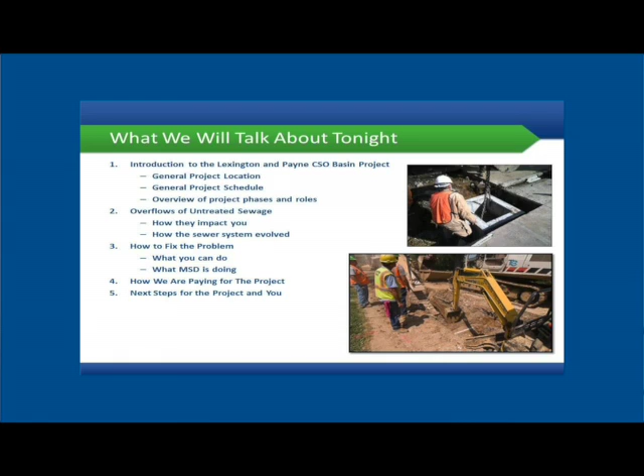Tonight we're going to be talking about an introduction to this basin that's in this neighborhood area. We'll talk about the general project location, the schedule, overview of the project phases and roles, overflows of untreated sewage, how they impact the community, how the sewer system evolved to how it is today, how we can address or fix the problem, what we can do as residents, what MSD is doing as an entity, how we are paying for this project, and what the next steps are as we move forward in this project design.

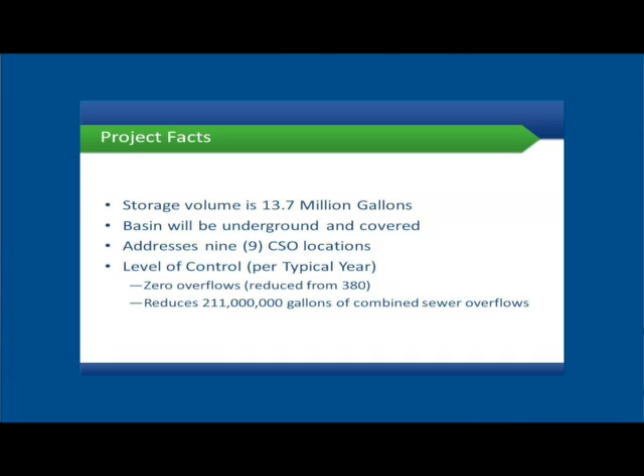This project that we're talking about tonight, again just in the beginning of the design phase, is going to store about 13.7 million gallons of overflow, which is diluted rainwater, stormwater mixed with sanitary sewage during rain events. The basin will be underground and covered. It addresses those 9 CSO locations shown on the map previously. The level of control means we had to pick a design year, which is 2001, a typical year. Typically we would have 380 overflows of sewage when it rains into Beargrass Creek Channel, but we've designed this basin such that for that same design year there would be 0 overflows. That amounts to about 211 million gallons of combined sewer overflows that are eliminated from Beargrass Channel on the typical design year.

The next phase in our major projects rolling out for public input would be the conceptual design. That's where MSD would come out, present concept options, and gather ideas and preferences from the community and the neighborhood where the basin or project is located. The third public meeting would be the advanced design, where we'll come back with design options after hearing input from the conceptual design phase, presenting options the public can review and again give input on for ideas and preferences at that time.

At that time, we'll go to the final construction or final design phase, and we'll come back for the last public meeting, prior to construction. At that point, we'll announce when construction begins, who the contractor is, and who our contacts are with MSD and the contractor, so you know who to call if you have a problem.

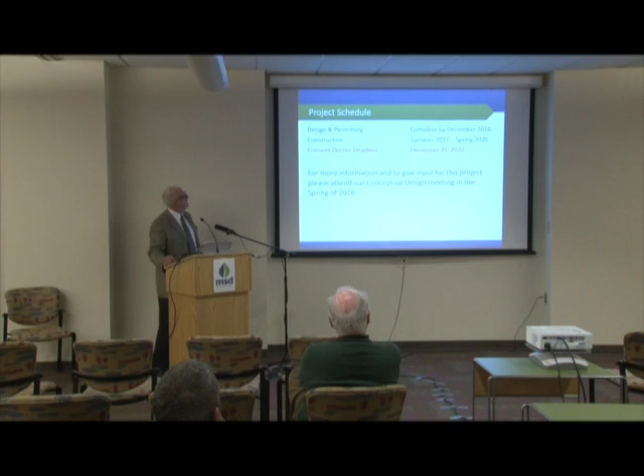For more information or to give input, we'll come back in a few months. We'll talk about information we've gathered today, and we'll have gone into some conceptual designs that we'll present in the spring.

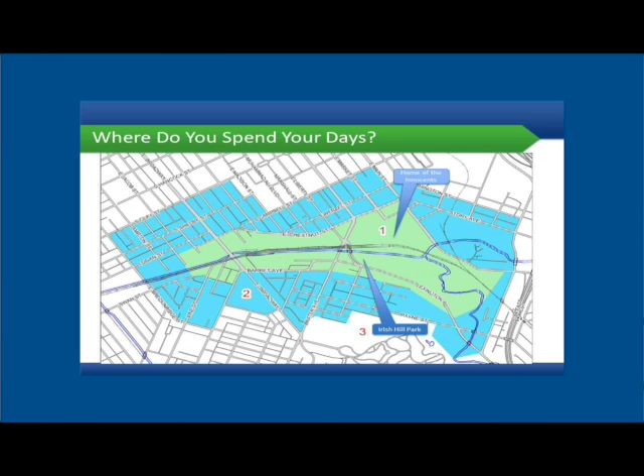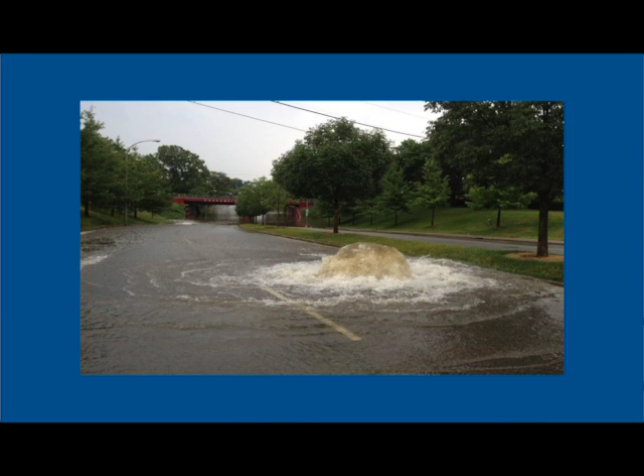What you may not know is that it also happens in streets. This is down close to U of L. So in a rain event, our system can overflow, and that's not just rainwater coming out of the system - that's sewage and rainwater. It can come into roadways, backyards, basements, as well as the streams we just spoke about.

So we don't want that in our community. It's not only a visual impediment, but primarily it's a health impediment. We want the health of our streams and the health of the public as well.

So what's the history of this? What's the public health and safety mandate of this?

In 2003, the EPA and MSD started talking about what can we do to improve the quality of our streams and our collection system. In 2005, we entered into a consent decree, and that is that we agreed by court order to do some things to fix the system.

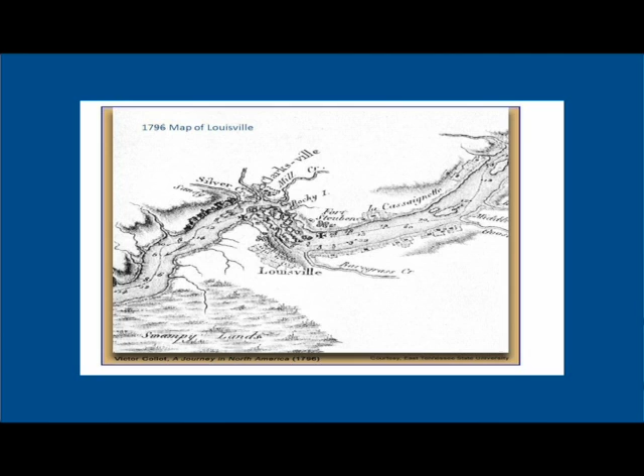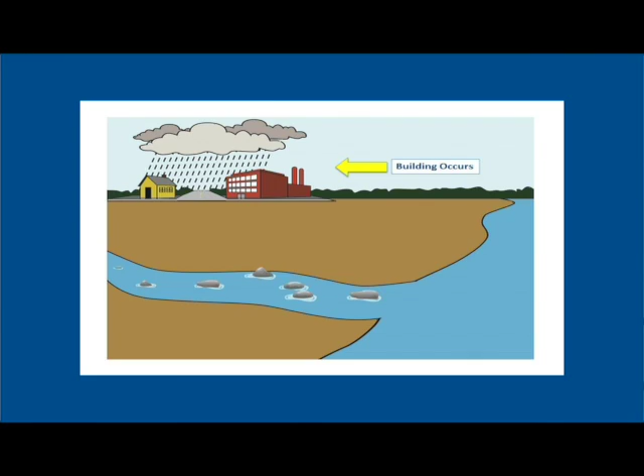So when building started occurring in an area that was swampy and poorly drained, Louisville continued to grow. There was no sanitary system to handle the wastewater or no storm system to handle the storm sewer. Everything just flowed to the streams.

No system. So as a result of that, public health suffered. We had numerous epidemics of cholera and typhoid during this time. And you can see why. All that filth is out there for contact with pets, humans.

So let's get your clickers out. We'll ask a couple questions here. When were the first sewers built in Louisville? When do you think? At the founding of the city, before 1850, the beginning of the 20th century, or during the Depression?

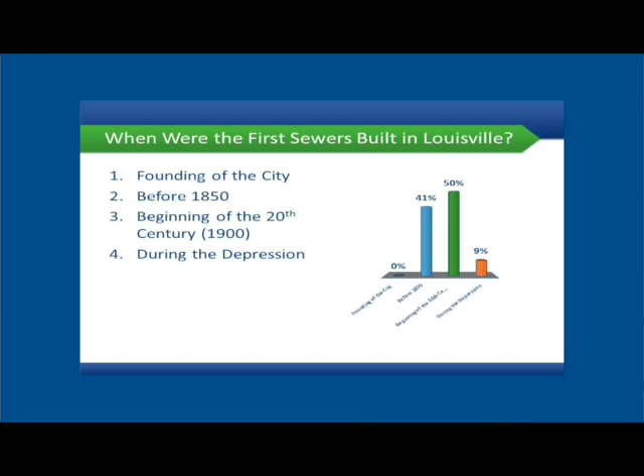All right, people think at the beginning of the 20th century. Sewers were built in Louisville by 1850, the beginning of the work. This is obviously later than that, but in 1850 was when sewers first started to be constructed in Louisville.

We continued to build sewers, larger and bigger sewers. That's the southwestern outfall. That's the backbone of our drainage system that empties out into the Ohio River. It's still in service today. You can see you could fit a locomotive inside that pipe system.

The only problem is this did remove the waste from the downtown streets and the developed areas, but guess where did it go? Went to the Ohio River, to Beargrass Creek, to the Ohio River. Would you want to live in Evansville after a rain event?

Here we are in Louisville. Cincinnati had the same thing. The Ohio River was flowing from Cincinnati down to us. So at the time, we were getting away from the downtown streets, but we're just polluting the larger streams. We learned that everybody lives downstream from somebody else, so we have to do something better than this.

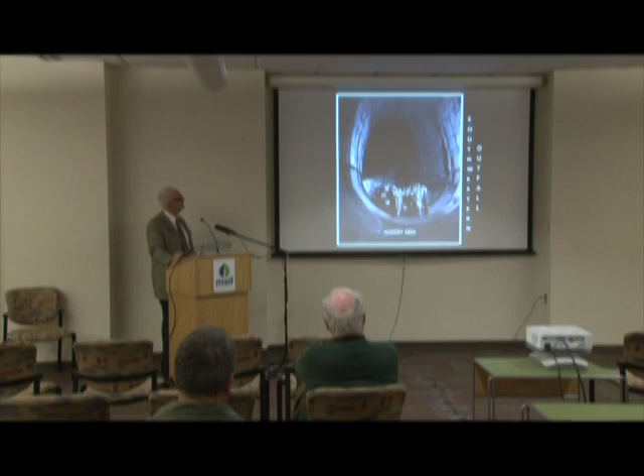So the Louisville Water Company was formed in 1860. Running water started to become available to homes, so you can see water lines are being connected. That meant more water coming into the house. Where is that going to go?

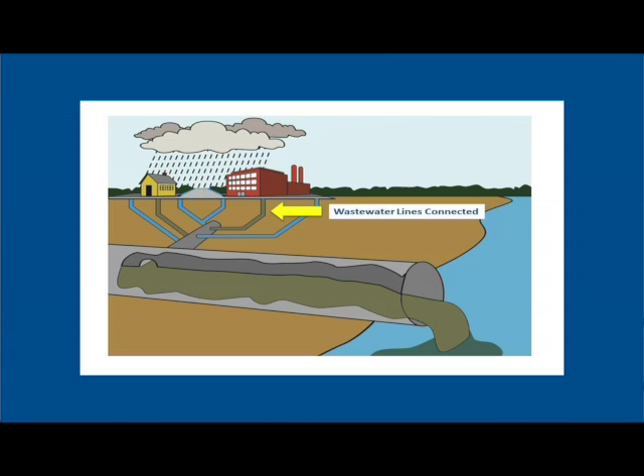So they started collecting the water that was going into the house and come back into those storm systems that were built going out to the Ohio River. So that was one thing that was done. We started collecting from the houses the new water that was coming in from the water company, again, being emptied into the Ohio River.

In which decade did Louisville begin to treat sewage? 1900, 1930s, 1940s, 1950s, 1960s. And recall, up to this point, we're just sending it into the big pipe out to the river. So when did we start to begin to treat sewage?

Okay, looks like a lot of us think the 1930s. It was not, so again, we'll go back to that slide. The wastewater lines were collected, connected, and going out to the stream.

It wasn't until 1958 that the first wastewater treatment plant was constructed in Louisville. So remember, all the water was collected and went out to the stream, Beargrass or the Ohio River, when it rained. When we first started doing treatment, we built weirs in those larger pipes, and had to build a deeper pipe to send it to the plant, so that in dry weather that lower amount of flow would fall into here, and it was just the raw sewage going to the plant during dry weather.

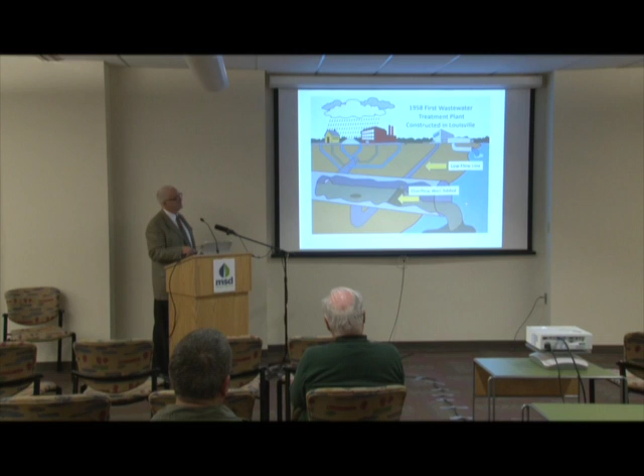Then when it rained and the system was overwhelmed, that's when it was diluted and sent into the Ohio River. That kept the raw sewage from going straight into the Ohio River - it went to treatment, but then during rain events, it overflowed. Combined sewer overflows is what we call that.

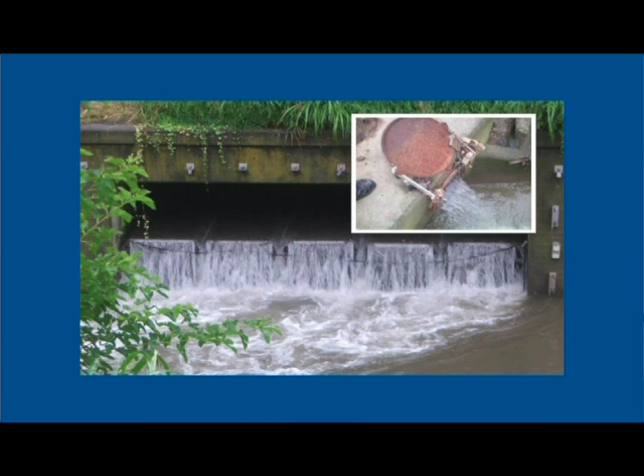And there's a picture of what one looks like. Anybody know how much rain it takes to cause this condition? That's sewage and rainwater coming into Beargrass Creek.

As little as blank inches of rainfall can cause an overflow. A tenth, a half, 1 inch, 2 inches, or 5 inches of rain before we get overflows out of the system.

All right, we think a half an inch. The answer is a tenth of an inch. With as little as a tenth of an inch of rain, water and sewage leaves the system untreated.

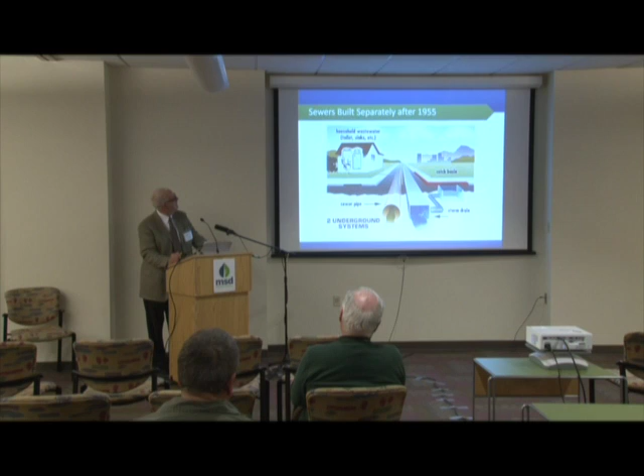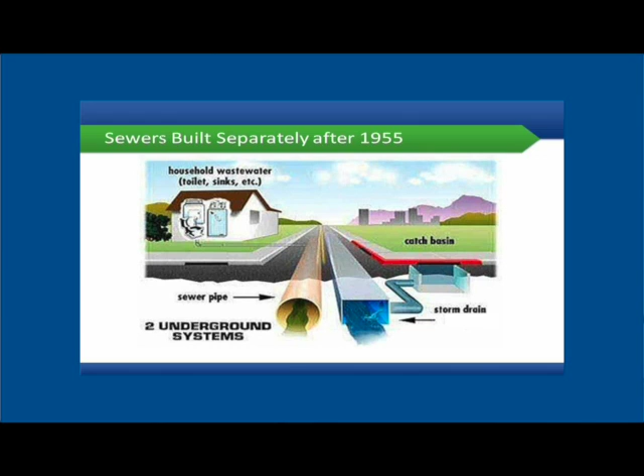It wasn't until 1985 that MSD began expanding its service area and started taking over systems further out in the county that had been built without standards prior to 1985. These old separate systems, designed prior to today's standards and material qualities, can have overflows during rain events. Projects are underway to address these problems as well.

MSD is responsible for the sewer system up to the foundation of the building where it's connected, or to the easement or right-of-way - MSD only works in the main sewers in the middle of the street. What do you think about that? Use your clickers.

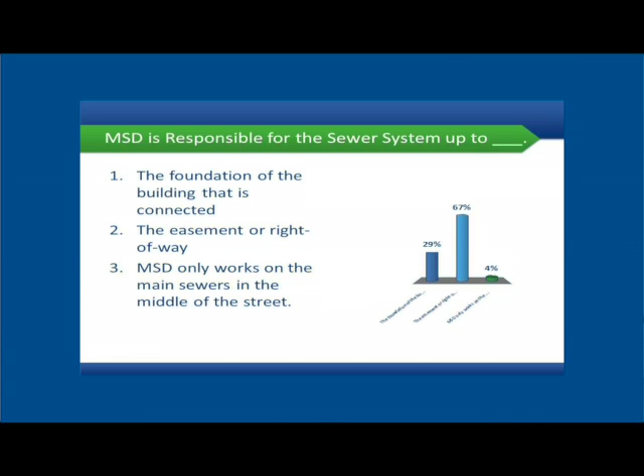All right. The easement or right-of-way, that's correct. That's the public side - the MSD side is to the easement or right-of-way line.

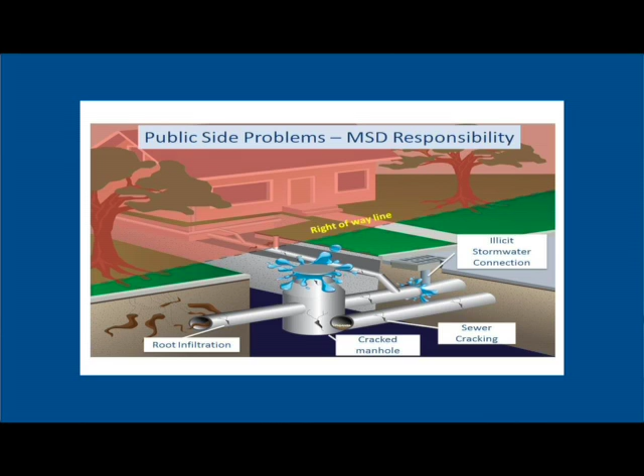So problems that we take care of and have responsibility for with MSD are illicit stormwater connections into a sewer line, poor materials where the sewer is not sound, or root infiltration into old pipes. Those are, in easements or right-of-way, MSD's responsibility. However, on the private side, outside of the right-of-way or easement, it's the homeowner's responsibility, not MSD's.

So with that, downspouts have been connected to sanitary sewer. Well, what's in a downspout? That's rainwater during a rain event that's coming into a system that gets overwhelmed.

Sump pumps are connected to sanitary sewer. The sump pump is just collecting groundwater from around your foundation. So some people are pumping that into the sewer system, which is illegal. An area drain, a yard drain, connected to the sanitary sewer - and again, roots in a failed system on site as well.

The problems on the private side are just as severe as the ones in the public right-of-way, and MSD can't legally do anything to address those on the private side. That's the homeowner's responsibility. But we have some programs that can help with some of those.

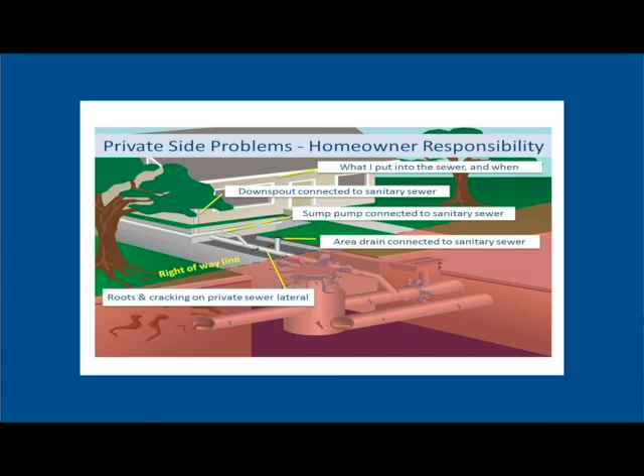And another example of this pipe - people say, well, how could that pipe be cracked? If you think of a lot of these pipes built in the 50s, 60s, and 70s, they were terracotta clay pipe, kind of like the clay pots you have plants in. What happens when they dry out, or when they age, is they crack. When those clay pipes crack, roots can get in there, groundwater gets in there, the cracks can expand, and that's allowing non-sewage water, groundwater or rainwater, to get into the system and overwhelm it.

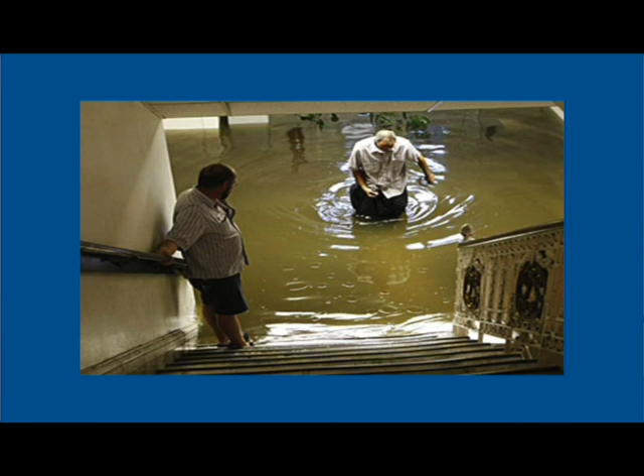So the range of overflows that we see in the separate sanitary system include large overflows on streams such as this, can be out in the streets, can back up into basements. This is a basement full of sewage. If this happens because of a failure on MSD's side, we take care of that - we'll take steps to address that problem.

However, sometimes this happens because of insufficient materials or workmanship on the private side, and that's not MSD's responsibility - it's on your side of the right-of-way line. So how can we fix this problem?

If the sewer line from your property to the edge of the right-of-way fails, it's your responsibility, and you'll want to fix that because you don't want sewage in your basement. It can be expensive, so we have a program that can help address that problem. We have an MSD sanitary sewer line replacement program, and there's a number you can call.

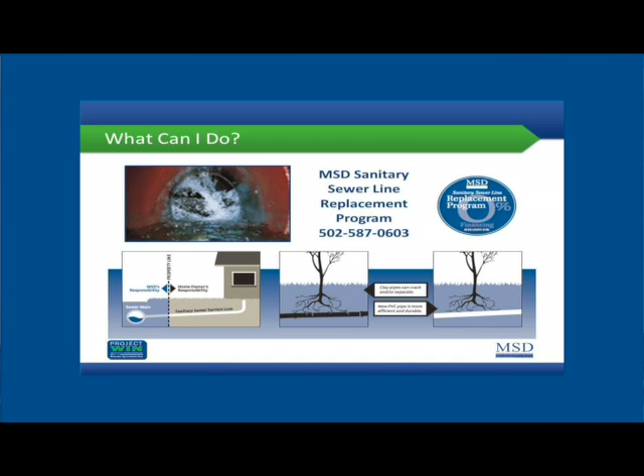So that work that's failing out in the yard, this area that's the homeowner's responsibility, we have a program that can assist with that. So we are sensitive to that cost.

What should I avoid using when it's raining? Based on what we said about rainfall and bad pipes allowing rainwater and groundwater into the system, what could I avoid using when it's raining?

Things that we can do as individuals. All of the above, that's right. When it's raining, the things you can control are: do I need to run my dishwasher when it's raining? You don't have to. If you could wait till after the storm event, that would be good, or washing machines. All those things would be good if you could, but some of those things you can't help but do. The sewers are full when it's raining, so anything you can do to keep from adding to it and overwhelming the system would be helpful.

I should avoid flushing wipes, even if they say they are green, flushable, biodegradable, on sale, not tested on pets, or all the above. Again, we're going through things that I can do individually as a homeowner or resident.

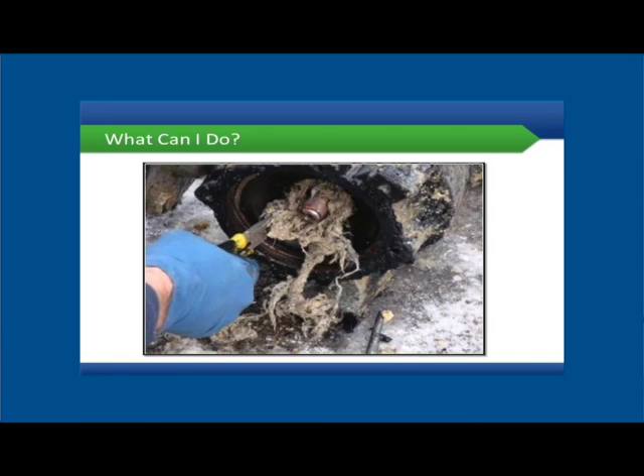And there's a close-up of just pulling up some rags out of a pump. So that pump has failed. Someone may have had a backup, or there might be a combined sewer overflow or sanitary sewer overflow at this pump station.

I should always put fats, oils, and greases on my garden, in the trash, down the garbage disposal, in my neighbor's garden, or in my sink. Now, obviously some of these are tongue-in-cheek, but we're trying to learn what I can do as an individual to alleviate this problem or to help.

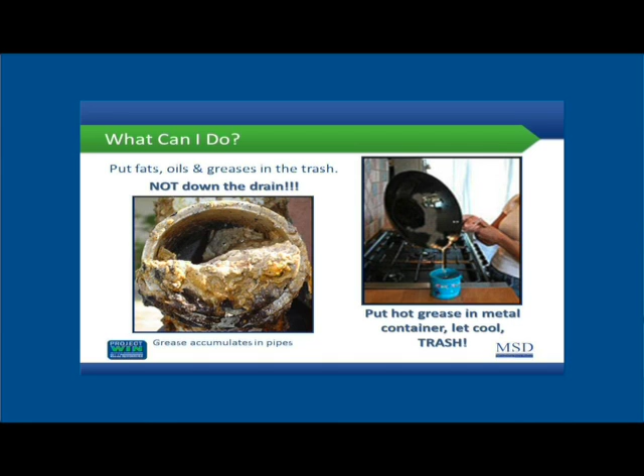All right, everybody voted? In the trash, that's right, not down the drain. It may be liquid when you first put it in the drain, but by the time it reaches 55-degree ground temperature, it's going to solidify again in the pipe. So that's what that looks like. What do you think the capacity of that pipe is once grease has gone down there? Looks like it's less than half to me. So put hot grease in a metal container, let it cool, and then put it in the trash.

My sump pump at my house should discharge to a storm sewer, to my yard, to my sanitary sewer, or on the sidewalk. To my yard, that's right - onto the grass or plants.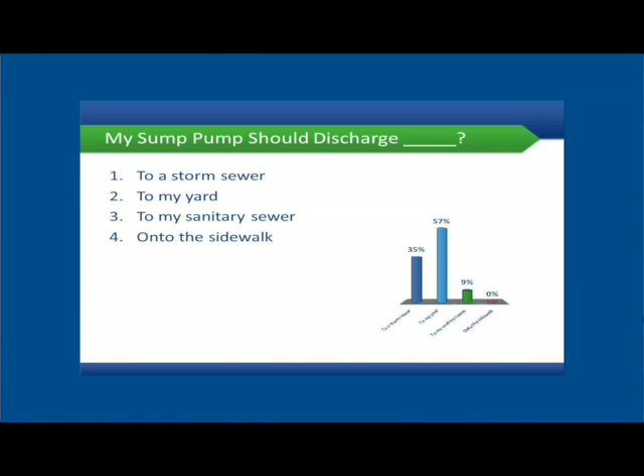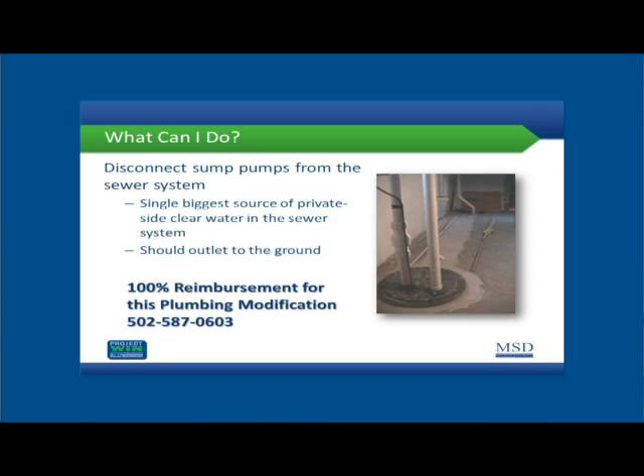One of the largest sources of groundwater entering our sanitary sewer system is from sump pumps. The sump pump discharge from 8 homes on a block can take up the capacity of the sanitary sewer that would normally handle 200 homes of just sanitary sewage. So if you have 8 houses with sump pumps discharging into a pipe, it's taking up the capacity of 200 homes that could be served. So think about that - it's very important that we get sump pumps disconnected from the system. We have a plumbing modification program with 100% reimbursement for this. So if you have a sump pump connected to the sanitary sewer, we can assist with getting that disconnected, and it needs to be discharged outlet to the ground.

All right, everybody voted? Excellent, I must be a pretty good teacher tonight. I like it, you're a smart class is what I have.

Okay, so that's things we can do as individuals. Now, what's MSD doing for these problems in the public right-of-way and in the easements?

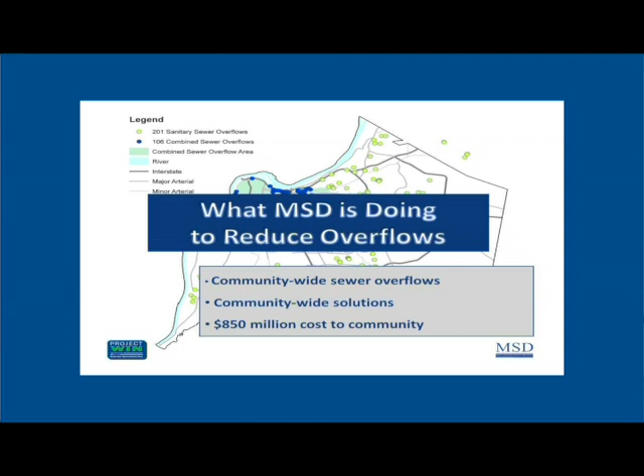Again, these are community-wide sewer overflows, not just in one particular neighborhood, and there are community-wide solutions that we're looking at. As we've cost it out when we created the integrated overflow abatement plan, that $850 million has cost the community. These are dollars that we need to spend wisely.

In our plan, we're working on the combined sewer system projects. That's what we're doing right now, and we're going to talk about that project tonight in this area. Then by 2024, we need to address all the separate sanitary sewer system projects. A lot of these basins that you've heard about in the community need to have those done by 2020. They have different deadlines, but they all need to be complete by 2020.

So how do we control sewage overflows? There's a couple different ways. One is you can control the source. We've talked about downspout disconnections, sump pump disconnections, sewer rehabilitation—keep the water out of the sewer before it ever gets to MSD, before it ever gets to the street. That's one way to alleviate the overwhelming of the sewers.

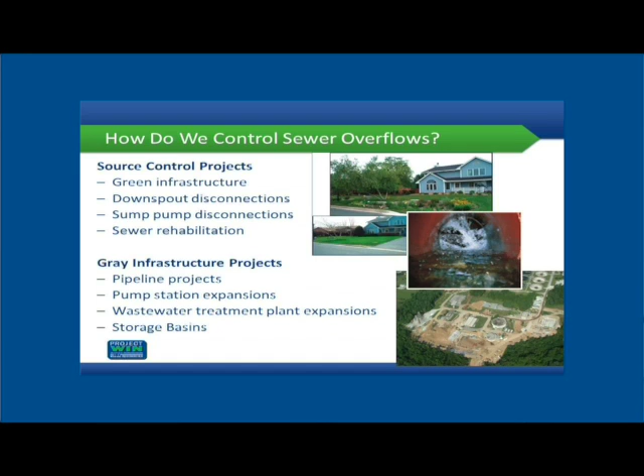The other is to build gray infrastructure projects, and that's what we're going to talk about tonight. Those are pipeline projects, pump station expansions, wastewater treatment plant expansions, or storage basins.

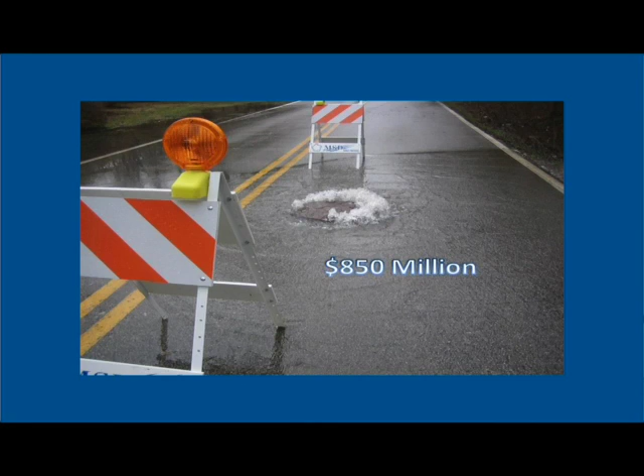How are we paying for these projects? As I said earlier, this is an $850 million program to address all of these overflow issues. We've worked hard to develop an approach and schedule to address all of these, and it spreads the cost over several years. But I can tell you there's no free money. It's not money that comes from Washington, D.C. or from overseas.

It's ratepayers right here in our community that are paying for this. It's not taxpayers out in the state of Kentucky, it's all of us that use the system here. So when we're talking about this cost, that's what I want us all to think about—it's coming out of all of our pockets, and it goes through our rates. We charge fees for services, and we have to pay for everything we do. That's how we get our revenues, through fees for services.

What do you think the average cost per mile to fix sewer overflow problems in southeastern U.S. cities is? Does it vary from $100 to $500, $500 to $5,000, $10,000, $100,000, $200,000 to $2 million, or does no one know? The cost per mile to fix sewer overflow systems in the southeast United States—what's your guess?

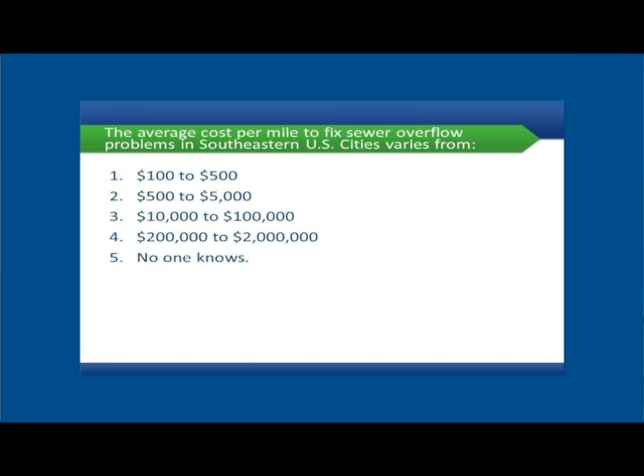All right, what's the next steps for this project and for us? We're beginning the conceptual project design, so we call this meeting the conceptual design meeting. We will have future meetings. We'll come back in the spring and talk about some things we've gathered information from you here tonight about the project. We'll be presenting some things there and asking some more questions.

Then we'll come back in the fall for the advanced design. We will have taken the information we've heard from the conceptual design meeting, incorporated it, come back and present some things to have public input on again. Each of those meetings will be followed up—if you can't attend, the presentations will be online for several weeks, and we'll have other input options. People can input on the same presentation; you don't have to be at the public meeting.

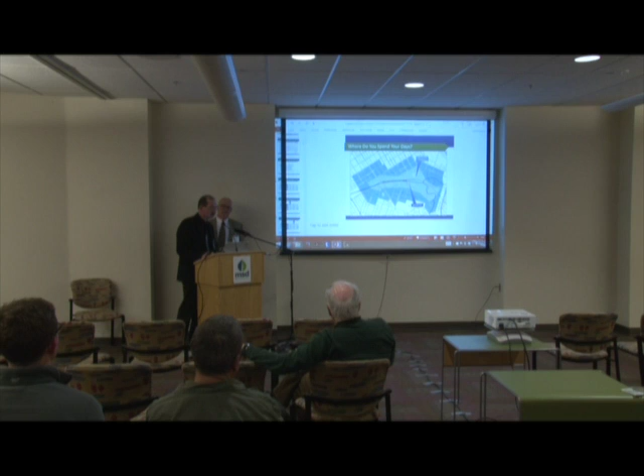It's going to be quicker than doing this. Do you have a picture of what basins that have been built look like already? We'll bring those at the conceptual design meeting. This is just telling you the background of why we're here, and we'll bring those next time, like the one over by the zoo that you're building currently, off Nightingale?

Yes. What is that one gonna look like? It'd be a below ground basin. And then how are they gonna finish that one off? That will have grass on top. Can they grow trees or anything over that one? We probably wouldn't put large trees over it, but it'll be green. Okay, so it'd just be like a little field? Yeah.

Okay, is this the one you're talking about? Yes, sir. So I know we're just talking, the concept is not drawn yet. Would all these overflows be remedied by the structure you're considering?

As you know, in the last 2 years we've had some of the largest rain events in the last 30 years, and the frequency of large storms is coming more and more. We have a design storm for this year selected by EPA and the consent decree we agreed to. So that typical year we're designing to, all of these CSOs would be collected. That 211 million gallons in that particular year would be collected in the basin. Once there's capacity in the system, that would be pumped back into the system for treatment, so that overflow, instead of getting to the creek, would end up at Morris Forman Treatment Center.

Now, there'll be a storm the first day it's completed that's larger than that. We will collect until the basin's full, and then it'll overflow just like it always has, but we will have collected the millions of gallons we would have stored at that time.

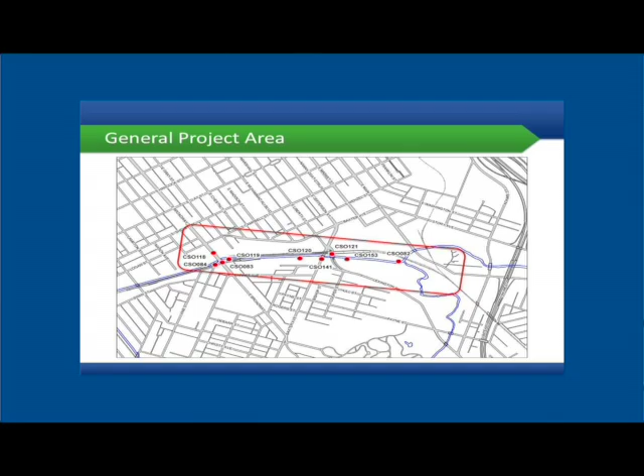So I've got some questions here I'll be happy to answer. Will there be an opportunity for reclamation of the Beargrass Creek as part of this project? Well, all these CSOs are where the channel is already improved as concrete. I don't know if the question is talking about taking it back to its original state before concrete. I don't know that. In the middle fork, I think the basin will actually be on that side of the confluence. You talking about here?

No. Yes, right. I think it will be just to the southeast of that red dot. I thought that was where the proposed basin was.

This is where the basin site has not been selected, other than—Brandon, what is that, a 15 acre site? What's the size? A 22 acre site.

So the creek on that site is not improved, and as you know, that's a contaminated site. The creek banks are also contaminated, so we're probably going to stay—the CSOs are from the improved part, but the basin will be near a natural part of the stream. If we are successful in purchasing that property, it'll be somewhere on that 22 acre site.

That's what we'll come back next time, and we will look at alternatives at that time.

If you have excess property after construction, will the community have an opportunity to have input on its future use? I think the answer is, because it's a contaminated site, there will be certain things we'll be obligated to do in order to do anything on the site. As far as what's excess after we're done, that would be an MSD and community decision. We certainly don't have any plans for any excess property—we don't need 22 acres when we're done. So I would say that's open to whatever's the best use, what the neighborhood would like to see there, working with the council and the neighborhood.